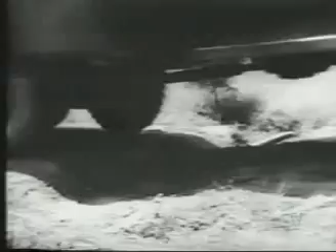No matter how heavy the load or how tired the driver, this little brake unit can transform a slight push on the brake pedal into a big grip on the brake drums. Let's get the general picture first.

This Hydrovac system uses vacuum created in the intake manifold to multiply braking pressure from pedal to wheels, and to maintain this vacuum so the brakes will work in an emergency even when the engine is stopped. This check valve is placed in the manifold line.

Here's how it works. Let's suppose this truck has been standing long enough since the engine was shut down to have air at normal pressure present in the entire system, having leaked into the manifold and slowly past the check valve. The check valve will rest by gravity on its seat. Now, we start the engine.

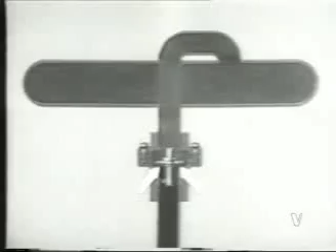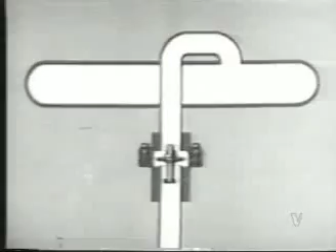Air is sucked out of the manifold, lowering the pressure above the valve. Finally, the trapped air below the valve lifts the valve from its seat against the reduced pressure in the manifold side. Now, manifold suction drains the air from the entire system, and the brakes are ready to function. The check valve drops down on its seat again, since there's no air pressure below it.

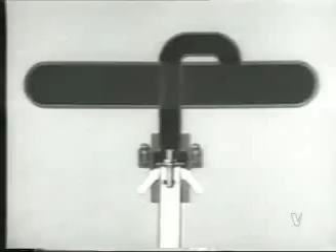When we stop the engine, vacuum in the manifold is no longer produced. Air rushes in and forces the check valve tight on the seat, trapping the vacuum in the system.

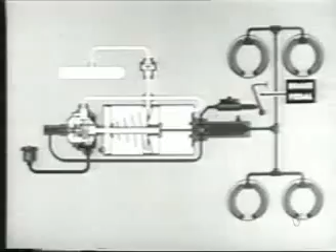Hydrovac brakes and another type called vacuum power brakes both utilize this check valve on the intake manifold line. But Hydrovac differs from the vacuum power system in two major respects. Hydrovac uses brake fluid instead of mechanical linkage to transmit pressure from the brake pedal to the control valve. And the power cylinder boosts pressure in the brake lines by means of a slave cylinder instead of the master cylinder in the vacuum power system.

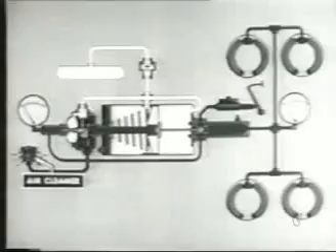Now let's get a clear idea of how that power cylinder works. When the brakes are applied, air rushes through the atmospheric valve and into the power cylinder. Notice the air cleaner. Part of the air has pushed against the first piston, and part of it, going through

the center shaft, has acted on the second piston. This simple arrangement gives us double the working area for air pressure without increasing the overall diameter of the entire Hydrovac unit. Now for the control valve.

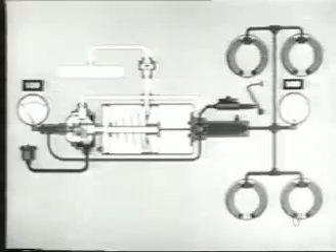In this system, the brake pedal is connected directly to the master cylinder. When the pedal is pushed down, the pressure of the foot moves the brake fluid forward and starts to expand the brake shoes. But as the pressure in the brake lines rises just above the pressure of the return spring

in the control valve, it pushes this piston ahead. That motion, acting through the toggle, closes the vacuum valve and opens the atmospheric valve. Let's examine that toggle more closely.

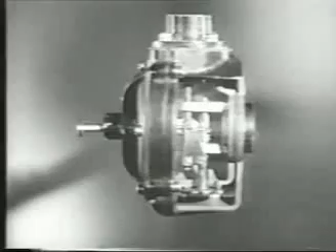This is a cutaway of the Hydrovac valve. This push rod represents the piston that moves under hydraulic pressure from the brake pedal and master cylinder. The rounded end of the piston bears against this short shaft, to which are attached these triangular-shaped toggles, one on each side of the shaft.

Now, better than words can do it, just watch the action of this simple but effective device. Notice that this valve spring aids in returning the atmospheric valve to its seat, in which position the atmospheric valve is sort of an anchor for the toggle action, causing further movement to pull down on the vacuum valve and

open it. And in the reverse movement, the closing of the vacuum valve comes first, and once closed, the toggle cannot move further in that direction. So now it must move against the valve spring pressure here and open the atmospheric valve.

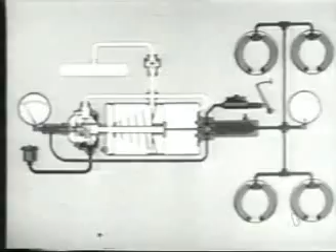Now suppose we look at this valve action with the airflow indicated in black. Pressure on the brake pedal compresses this spring as the piston bears against the shaft, first closing the vacuum valve, shutting off suction from the intake manifold.

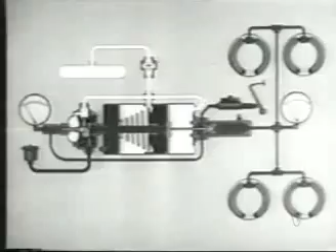Next, the atmospheric valve opens, air rushes in coming from the air cleaner, and goes into the power cylinder, forcing the two pistons toward the slave cylinder. This forward movement closes this check valve in the slave cylinder, traps the brake fluid in the brake lines proper, and multiplies the pressure on the brake shoes.

The hydraulic fluid pressure is also working on the slave cylinder piston. At the same time, the air behind the power cylinder pistons pushes against this diaphragm in the control valve. That will force the diaphragm back.

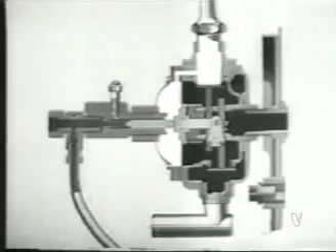The toggle will pivot on the vacuum valve, and this spring on the atmospheric valve stem now forces the atmospheric valve closed. This same force flows back to the brake pedal and gives the driver the feel of how much pressure he's applying.

If he needs more pressure to stop his vehicle, he presses harder on the brake pedal. This opens the atmospheric valve again, and the action you've just seen repeats itself.

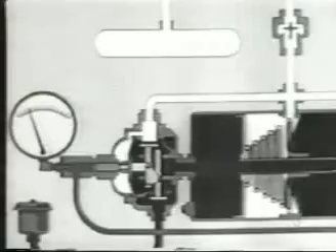Now for the release cycle. When the brake pedal is released, pressure on the brake fluid drops, and the spring in the control valve pushes the piston to the rear and moves the toggle into the brake's off position, closing the atmospheric valve and opening the vacuum valve. And with the vacuum valve open, the intake manifold quickly exhausts the air from the system.

The power cylinder pistons return to the released position, withdrawing the piston in the slave cylinder and removing the hydraulic pressure in the brake line. And that's how Hydrovac works.

Know your trucks. Know how they work. We've got to take a lot of men and a lot of stuff to a lot of places. So keep them rolling.